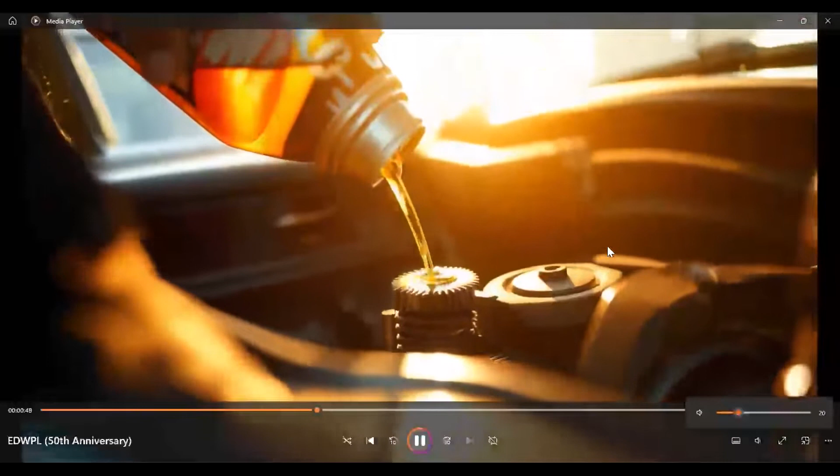नो विक्रम, आवाज नहीं लगा फिल्म का? Yes, sir. फिल्म का आवाज नहीं है? Hi, sir. आवाज नहीं है फिल्म का? Wait. So it's not audible. Yeah. No. Wait, sir. Sorry. Now it's audible. Okay. Yes, okay.

By Sigma Weld. The toothpaste you rely on, sealed tight by Sigma Cap Seal. Even the mouthwash that keeps you fresh, protected by our expertise. Every step of your routine, made seamless with us by your side. Even your safe and wardrobe, built to protect and secure, come from our welding expertise. The Nutella on your breakfast table, sealed with care by Sigma Cap Seal. From fresh juice to your children's favorite drinks, sealed by Sigma Cap Seal. As you commute, every vehicle you pass, cars, buses, trucks, and trains, runs with parts welded and heat treated by

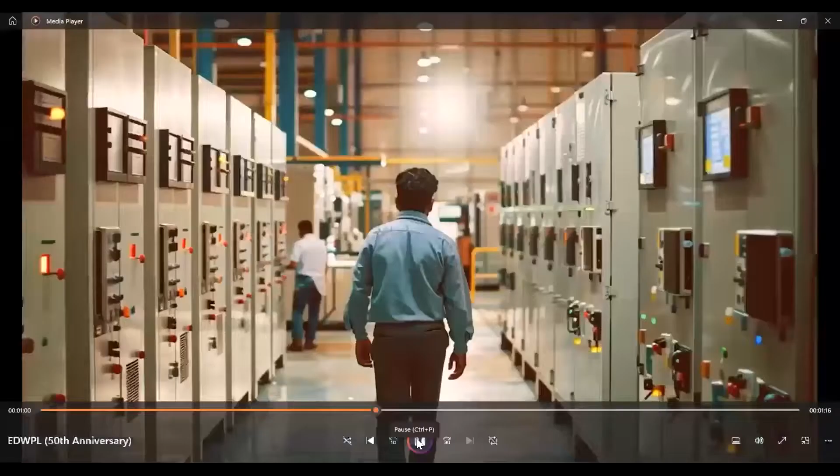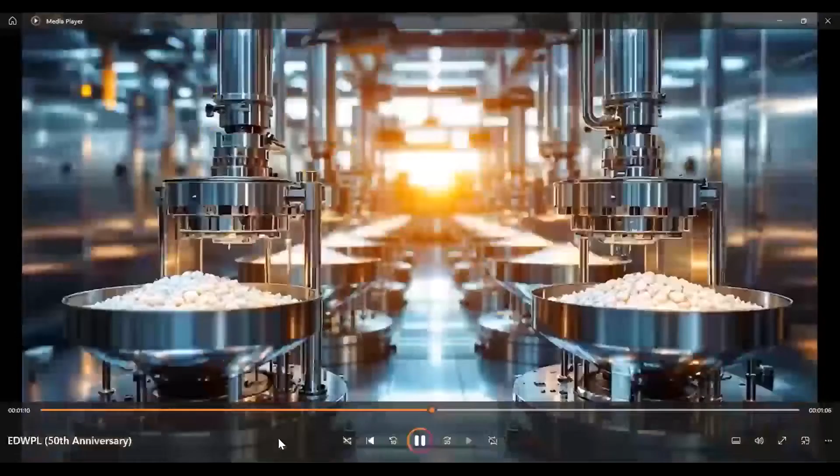Sigma Weld and Sigma Therm. Even the lubricants that keep these machines running smoothly, sealed securely by Sigma Cap Seal. Your comfort at work is made possible through air conditioning compressors, shrink fitted with Sigma Therm induction heating and welded by Sigma Weld. From switch gears, pre-molded by preheating, to the everyday devices you use, like your old phone, all preheated for molding using Sigma Therm's dielectric preheaters. In healthcare, we continue to make an impact. Our heating technology enables precision in the manufacture of tablets and capsules. Each bottle is sealed, and every cap is assembled with care by Sigma Cap Seal.

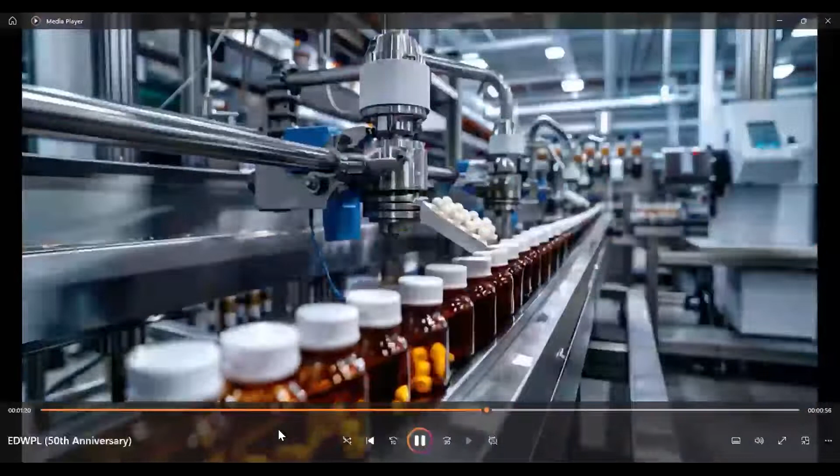From the steel utensils that serve your family to the bottles of ghee and masala that nourish them, every product is sealed securely by Sigma Cap Seal. Every jar, every flavor sealed to preserve freshness, ensuring your family enjoys the best every day. From the plates on your table to the pickles you savor, our technology touches your life in every way. Forged, annealed, hardened, brazed, sealed, packed, joined, welded. At every step, from the smallest details to the biggest innovations, we are there, touching your life at every turn. Add ED to your thought, and we'll make it happen.

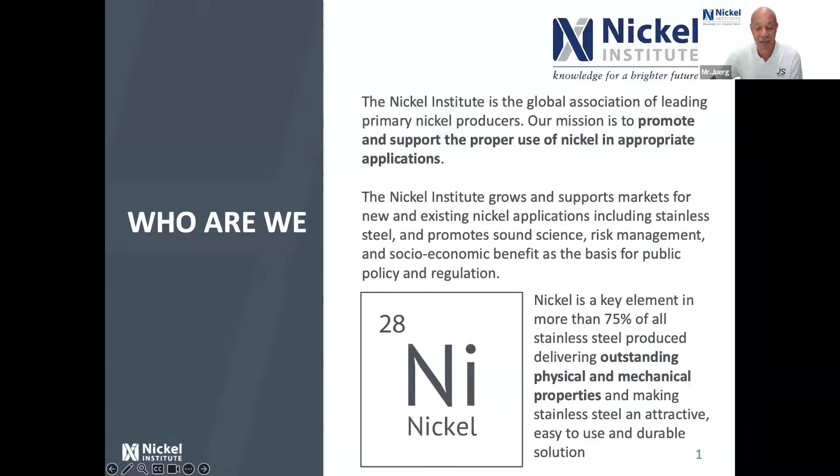Still, even with the hype of batteries, where a lot of nickel is used, still 70 to 75% of the nickel goes into stainless steel. That's why we focus that much on stainless steel and the education on stainless steel.

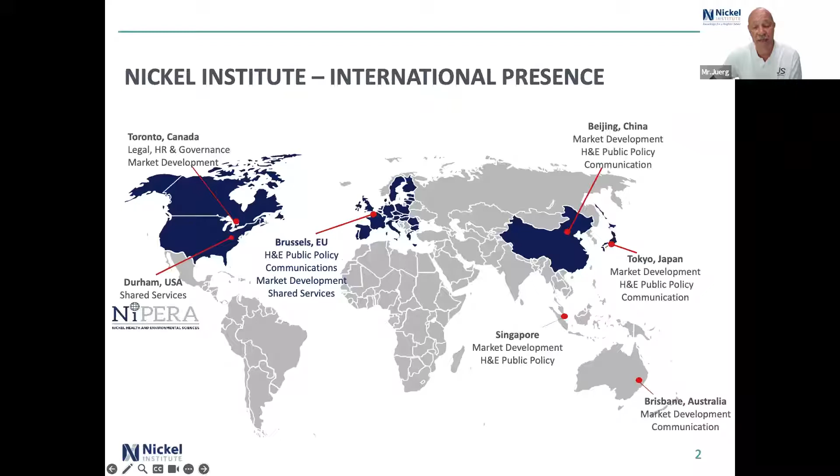Our headquarters is in Toronto, where Gary sits. Then we have science and research labs in the US in Durham, a European headquarters in Brussels, very close to the EU board. Then we go over to Asia, where we have a representative office, a non-profit organization office in China, and one in Japan. Then we have rep offices in Australia, and I'm sitting in Singapore.

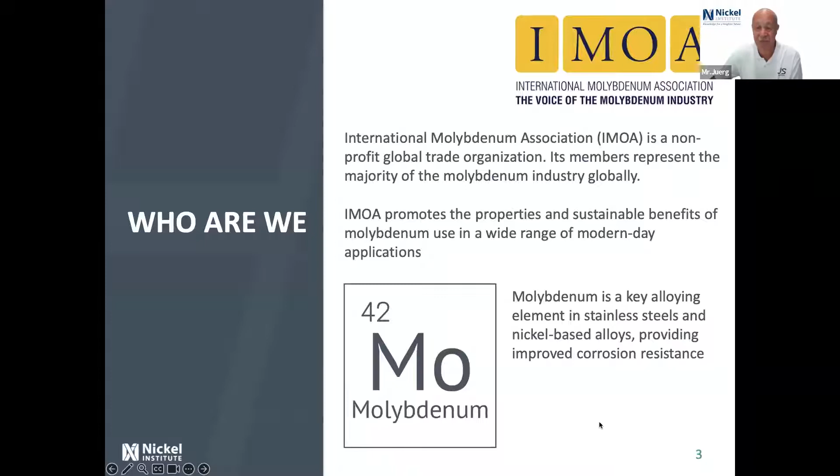IMOA is actually the same. They are representing the molybdenum industry. They are as well a non-profit organization. And as we all know, molybdenum is a key alloying element to improve the corrosion resistance as well as additional toughness and strength.

So they are as well in every daily life. Molybdenum is used especially in the higher alloying when it comes to the transition of green energy in the industrial and building application and so on.

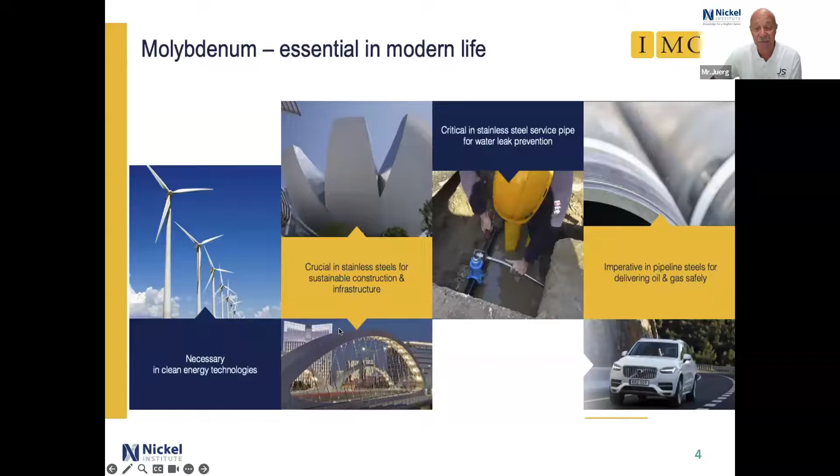But more important is actually the speaker of today, and that is Gary Coates. He is the technical manager for the Nickel Institute in Toronto. Gary is a metallurgical engineer who has worked in the stainless steel and nickel alloy industry for over 48 years, the last 25 with the Nickel Institute.

He has worked in many different end-use industries and with fabricators to ensure the quality of the fabrication, to ensure long life of the equipment. He is actively involved with many professional societies in the corrosion, welding, and metals and mining industry. He has made so many presentations on all aspects of the use of stainless steel and nickel alloys. Gary is a professional engineer registered in Ontario, Canada, where he is based and living as well.

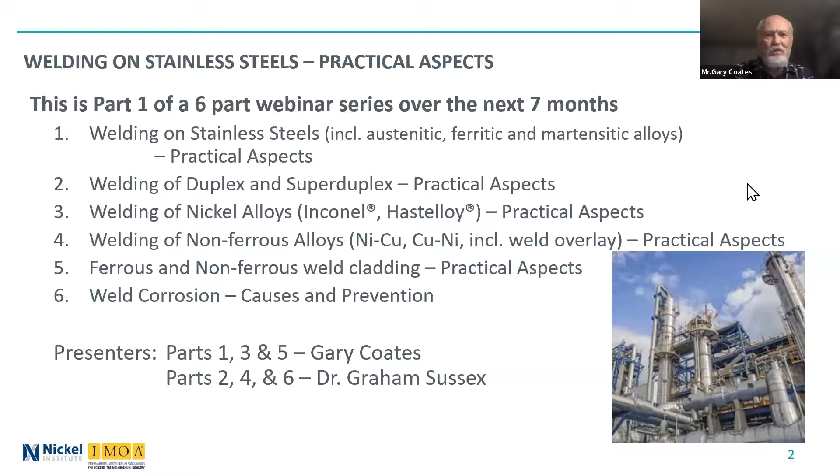So today's agenda: I'll make some general comments about welding of stainless steel, including some misunderstandings that are commonly seen, or at least I've seen throughout my career. We'll talk about welding of austenitic alloys, and it will not be a really complete one on austenitic. We could talk all morning or all afternoon or evening, I guess your time, about them, and then some details about welding ferritic and martensitic alloys, and we'll allow some time for questions.

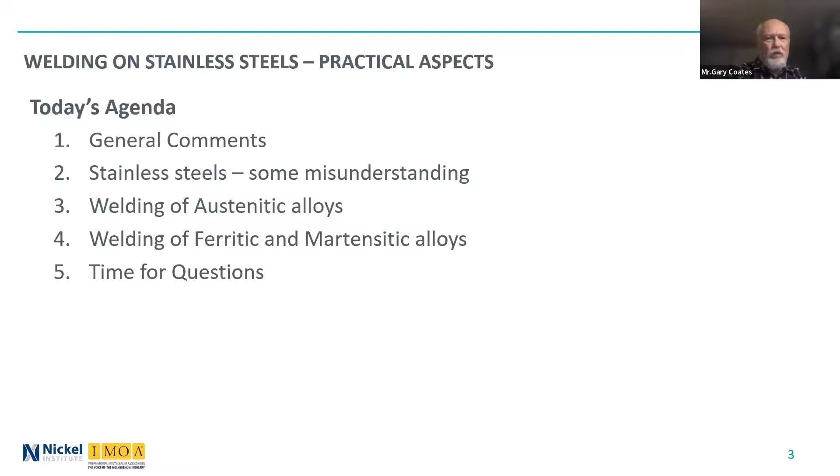So a few general comments, and I've done some of these webinars before, and I always like to emphasize that the welder is a very important part of this system. Most of us are weld engineers or weld inspectors or non-destructive testing people, but the welding involves both science and manual skills. When I look at the American Welding Society journal, there's practical articles, and then there's articles that are deep into the theoretical metallurgical part of it. So it involves both, and melding the two together are so important.

Welding involves a high level of skill. I really admire welders, their hand-eye coordination. And it's important for everyone, the welding engineer, to stay up to date. And it's important to train the welders in language and concepts they understand. So as a metallurgical engineer, I cannot use the words necessarily that I use to talk about welding with other welding engineers. I have to simplify it for the welders using concepts they understand.

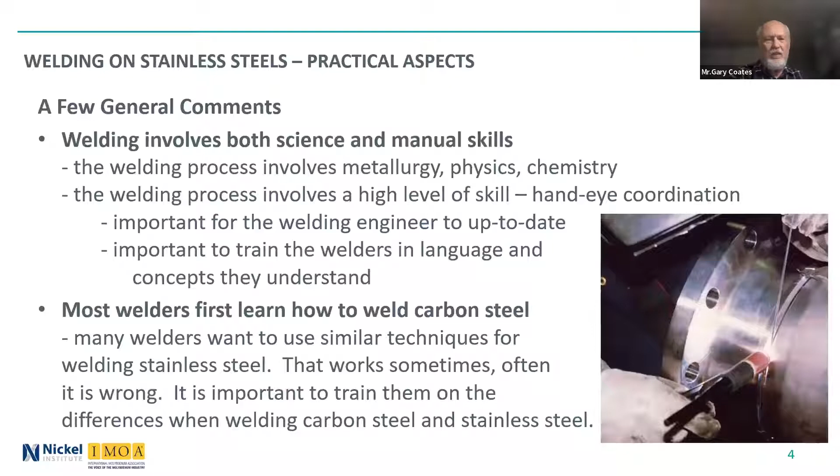Welding is critical to successful fabrication of stainless steel. And we really have to ask ourselves, especially as welding engineers, what is needed? Is this for corrosion resistance? Do I have to weld it to optimize the corrosion resistance, or the high temperature properties, the properties of interest, in which case it's maybe a completely different set of rules for the stainless steels.

One of the things welders often say when they're showing off a weld is, this is a good looking weld. And that is important, but it's not necessarily a good weld if they've used the incorrect filler metal, or sometimes no filler metal where filler metal is actually needed, or they used an unsuitable welding procedure, too high heat input, for example. The weld may look good, but it may fail quickly in service. And of course, they do not see that.

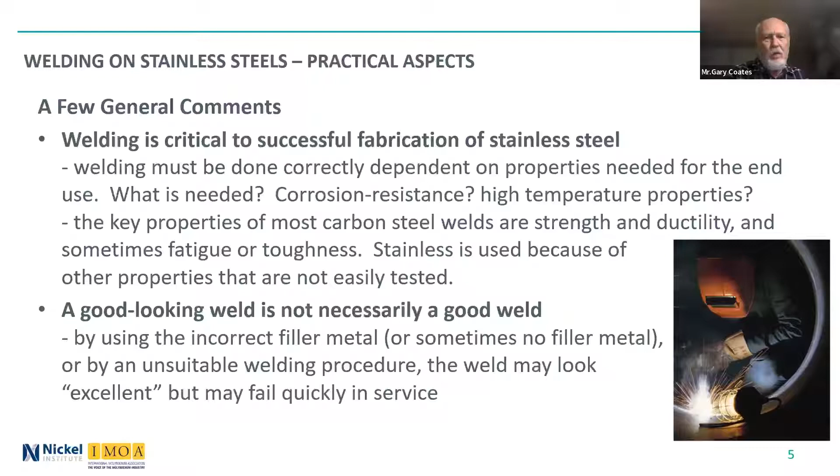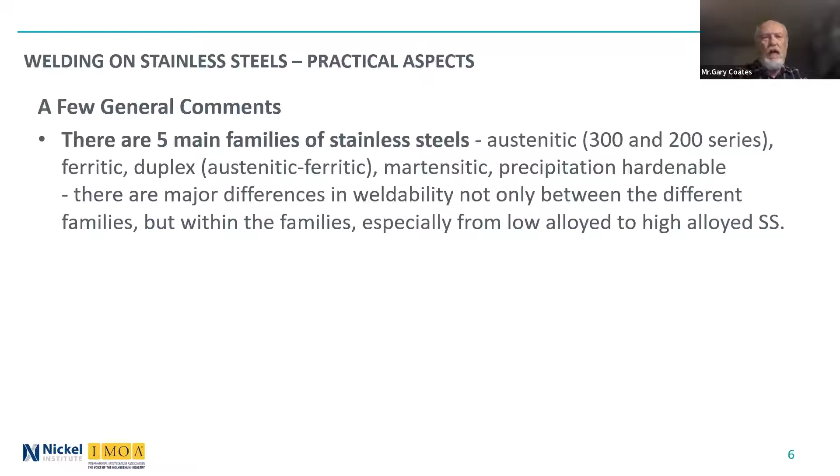We all know that there are 5 main families of stainless steels: the austenitic series, the 300 and 200 series, ferritics, the duplex austenitic-ferritic ones, martensitic, and precipitation hardenable. And of course, there are major differences in weldability, not only between the different families, but within the families, and especially between the low alloyed and high alloyed stainless steels.

One has to remember there are hundreds of types, and in North America with ASTM, we use the word 'type' preferably instead of grades or alloys when referring to the ASTM standards. But there are hundreds of types of stainless steel. For example, ASTM A240, which is the plate, sheet, and strip specification, there are close to 200 different types or alloys listed. In some of the other ASTM standards for other product forms, there are even more alloys listed.

So there's a whole group of alloys there that some were very familiar with, and some were not familiar with very much at all. And of course, in different national standards, there can be variations of many of these grades too, and grades that aren't included in the ASTM.

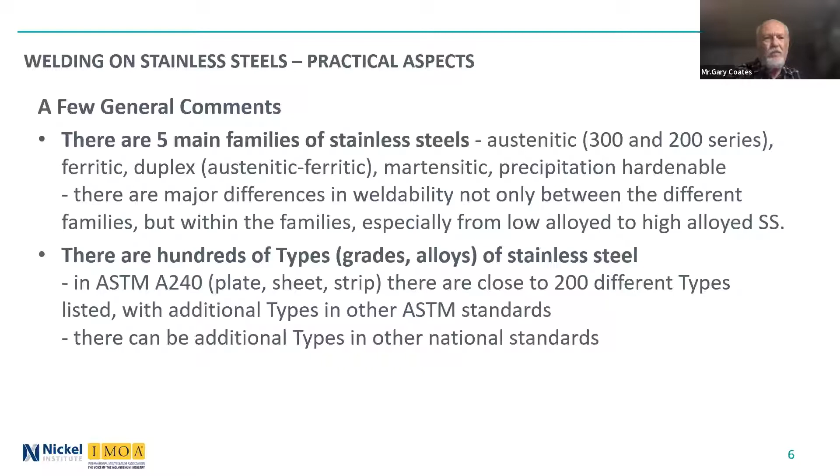So it is really critical for the welding engineer, the quality assurance guy, the foreman, to know the exact alloy being welded. Now, I'm posing the question, is it important for the welder to know that? And so I'm going to take a few cases here.

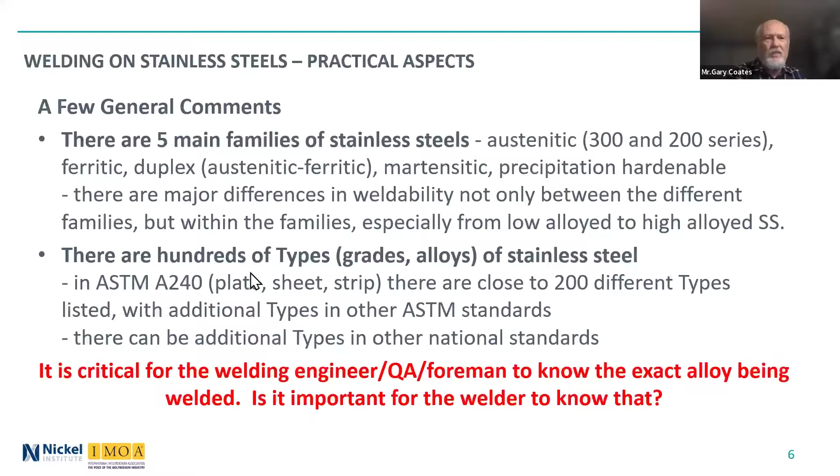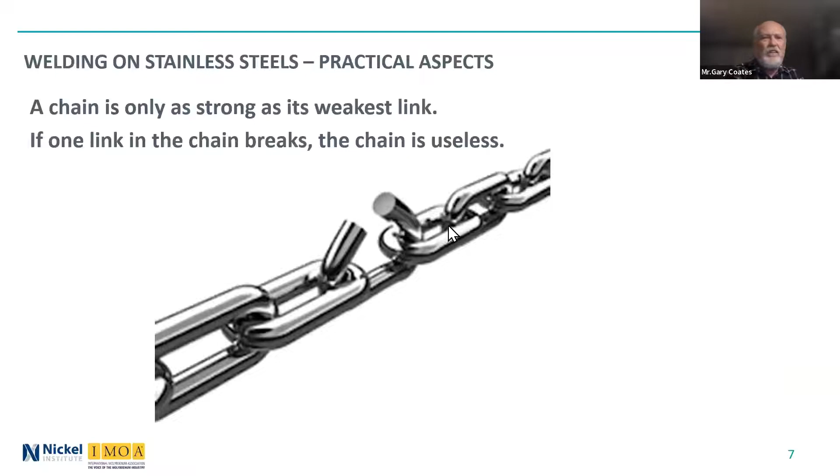First of all, the chain is only as strong as its weakest link. That's a common expression we use. And if the chain breaks, the chain is essentially useless. So if the welding engineer has specified it right, but the welder is doing it wrong, essentially the weld is bad. And the welds in a stainless fabrication are usually the weakest link.

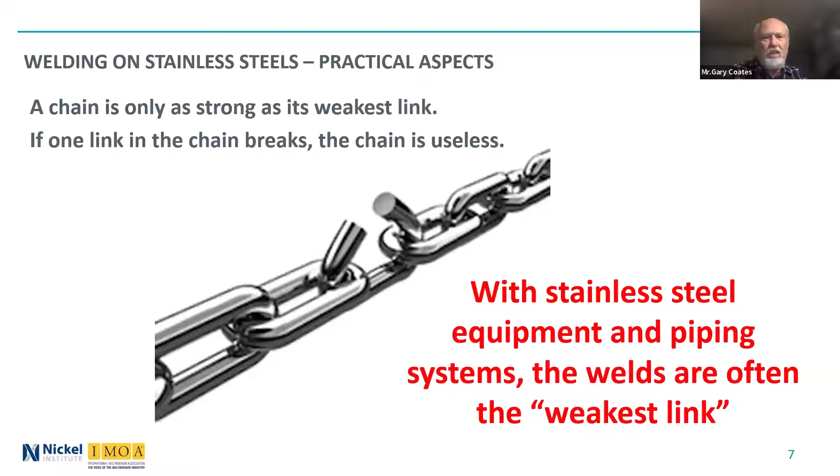So let's take a couple of misunderstandings that I have come across. The first one: the welder knows that 308L filler metal is the matching filler metal for 304L, but after finishing most of the components, he ran out of 308L, and decided to use 316L to finish the job. After all, 316 is higher alloy. It's got molybdenum in it, a little higher nickel content, and it is more corrosion resistant than 308L. Was what he did correct?

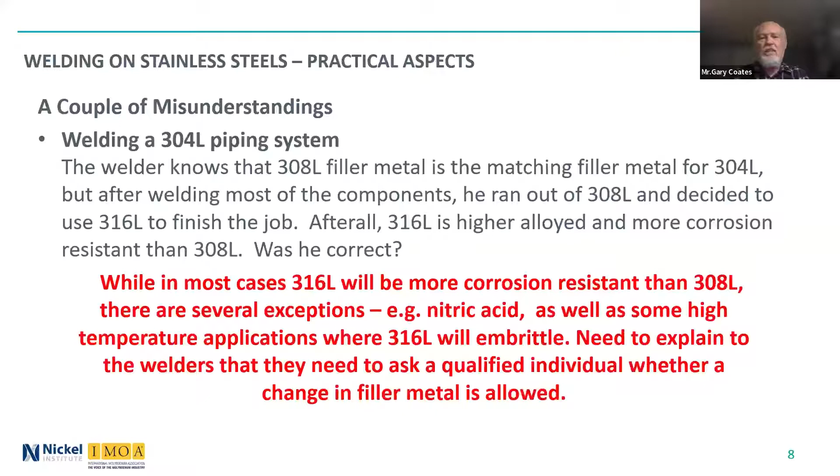Well, in most cases, 316L is more corrosion resistant than 308L, but there are several exceptions, one of them being nitric acid, where 308L, 304L is more corrosion resistant than 316L. And there are some high temperature applications where 316L will embrittle, where the 308L will not embrittle as quickly. So we need to explain to welders that they need to ask a qualified individual whether a change in filler metal is allowed. Now, if you were doing something very strict in the nuclear industry, there would be probably no question about the welder changing the filler metal on his own. But in many plants, and especially when there's fewer people around, he may make the decision himself.

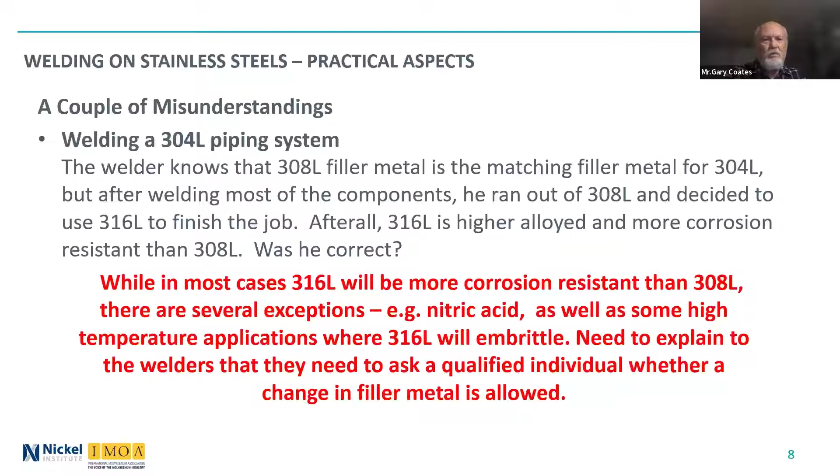So another example on a 316L tank, a welder did the qualification testing using 308L filler metal on 304L plate. That qualified him for welding the ASME P8 Group 1 material. His weld passed the bend test, and maybe a tensile test was done too. Then he was given 316L shielded metal arc electrodes to weld up the tank, but they didn't weld as nicely as the 308L he'd used in testing. So he switched to 308L. And why not? They passed all of the tests that he had to do.

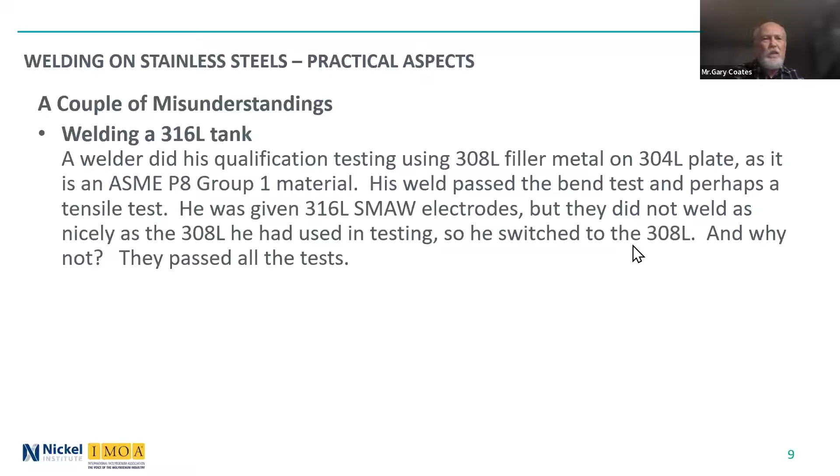And of course, most of us know that that is completely wrong. 316L in this particular case would have higher corrosion resistance to the tank media, and very rarely do we ever do corrosion testing as part of the qualification. So the welder hasn't understood that, even though both meet the ASME P8 Group 1 material qualification, there's a difference in why the different alloys are used. Therefore, you did it wrong.

Now, some of you might say, oh, that'll never happen in my shop or in my chemical plant. But in reality, I was involved in a case that didn't involve 308L and 316L - it involved duplex and super duplex, where they got qualified on 2205 material. The component was actually the super duplex alloy, and they welded it. The shop foreman and the welders were all happy to weld it with 2209 filler metal, the one for 2205. And of course, they even delivered the component to the end user. Then it was discovered that, wow, this is completely wrong. The whole job is essentially scrapped. You have to grind out the weld and re-weld it, and you still get an inferior product. So this actually does happen.

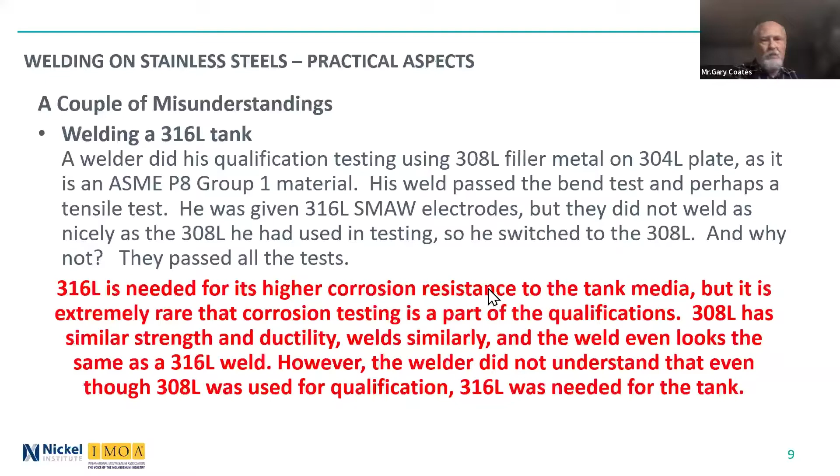And a third example here, again from my past experience - we were doing some training of welders and welding foremen at a chemical plant in Canada. The chemical plant handled some very corrosive, nasty chemicals, hydrofluoric acid. If you've ever worked with that, you know it is extremely dangerous for personnel. We had a question period at the end, and one of the welders asked why we didn't talk about the electrodes that could be used for many different stainless alloys, and we didn't quite understand what he was talking about.

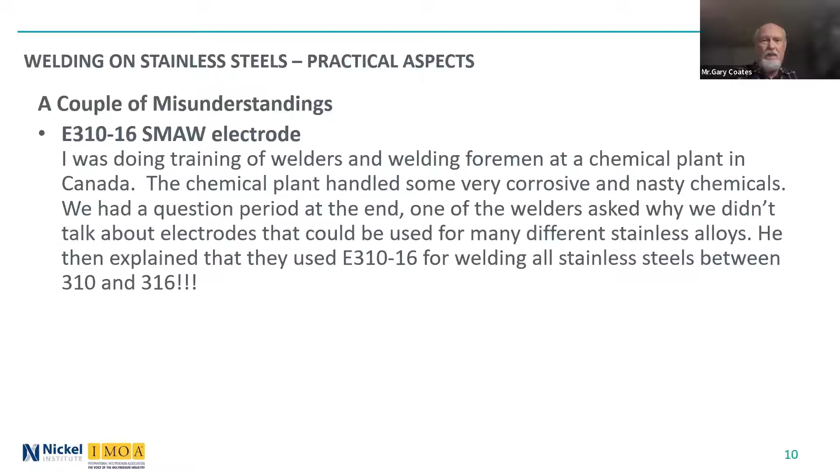He explained that they used 310-16 for welding all stainless steels between 310 and 316. Again, we were all shocked, literally horrified to hear it. The other plant engineers were horrified too that this was actually happening. Again, training the welders on the classification - the -16, I'm sure you all know, is the type of coating on the coated electrode - but the welder probably was told by somebody else that this was the case, and that's what he used. That resulted in a very dangerous situation where a material that shouldn't be used for that particular job was used, with the possibility of major leaks and danger to personnel.

Something similar is that, and I've seen it a few times, we've been told that an alloy such as 347 has very high corrosion resistance. They believe it's true because the number is higher than 316L, 317L. You can sort of understand where that's coming from - 316L is a higher number than 304L, usually more corrosion resistant; 317L is a higher number than 316L, more corrosion resistance. But of course, it's completely wrong. And we've seen this both in North America and in Europe.

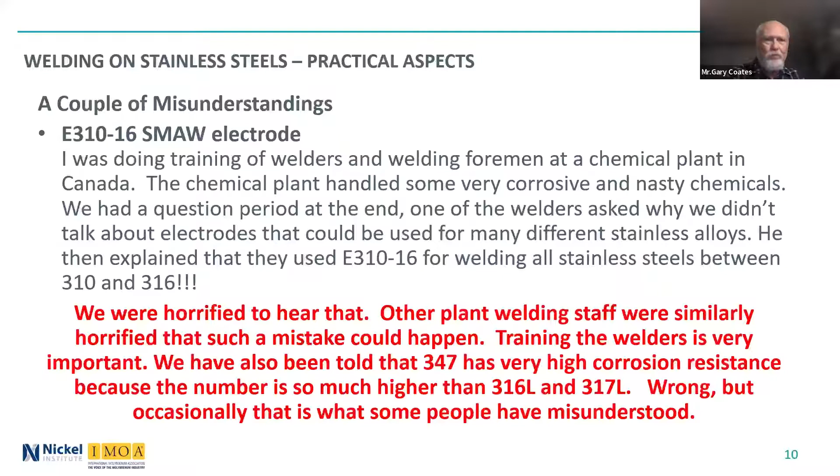So let's move on to talk about austenitic stainless steels. Over 75% of all stainless steel produced is an austenitic type. So if somebody says, I've welded stainless steel before, chances are it was an austenitic grade - most likely 304 and its variants, 304L, 301, 302, are really the most common steels encountered. And if you work in a chemical plant, you know 316L is extremely common too.

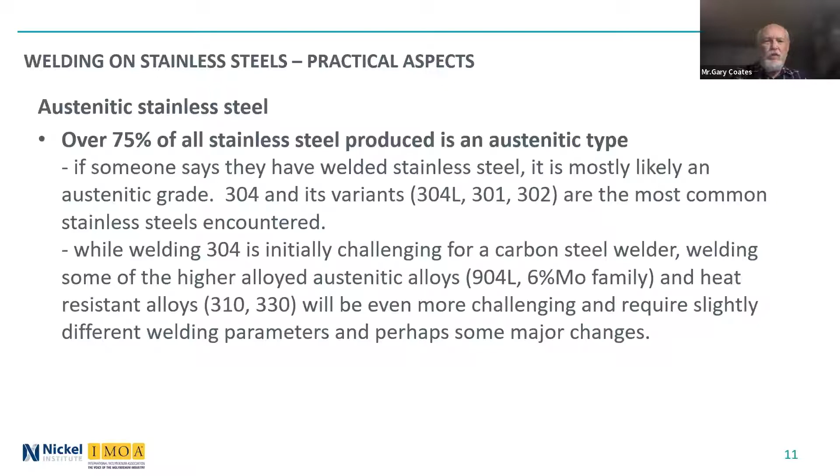Welding 304 is, of course, as we all know, initially challenging for a carbon steel welder. But when you go to welding some of the higher alloyed austenitic alloys - 904L, the 6-moly family, grades like 254 SMO and AL6XN, and some heat-resistant alloys - they're even more challenging, requiring slightly different welding parameters, and in some cases major changes. So just because somebody says I've welded stainless steel doesn't mean they really know what stainless steel they should be welding. It's up to us to make sure they understand the important differences.

So there's lots of things I can talk about in austenitic stainless steel. I'm going to focus mostly on the ferrite content. Most of us know that many, not all, of the austenitic filler metals have a composition designed to result in a certain amount of ferrite in the weld metal. The reason for this is to prevent, or at least lower the risk of, hot cracking in the weld metal.

There are a number of misconceptions about this, less among weld engineers, but among welders. They hear ferrite and think ferrite is iron, because the chemical symbol for iron is Fe. Of course, ferrite is not iron, it is a metallurgical phase. Ferrite, austenite, martensite—those are crystal structures.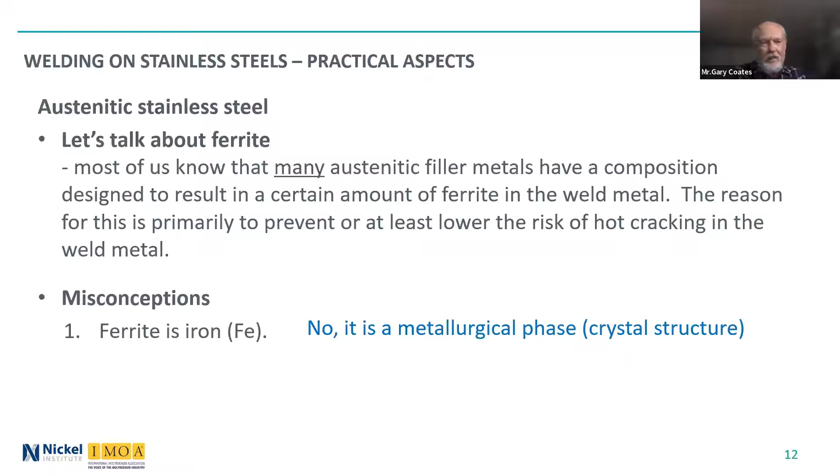So in itself it's not necessarily dangerous, but since all stainless steel has iron, there's a perception that, okay, there's iron in stainless steel, so that is my ferrite content, that's how I get it, it's the amount of iron. Well, no, that's not it.

Secondly, people think manufacturers of electrodes and wire add ferrite to the wire or electrode, something you add. No, it is the composition that determines it—the composition of both the wire, and if there's a flux involved, the coating on the flux. The amount of ferrite that forms is determined by the composition of the wire and coating, and also involves the cooling rate of the weld.

A faster cooling weld will have a different ferrite content than one that is slowly cooled. Not a huge difference, but something that's important.

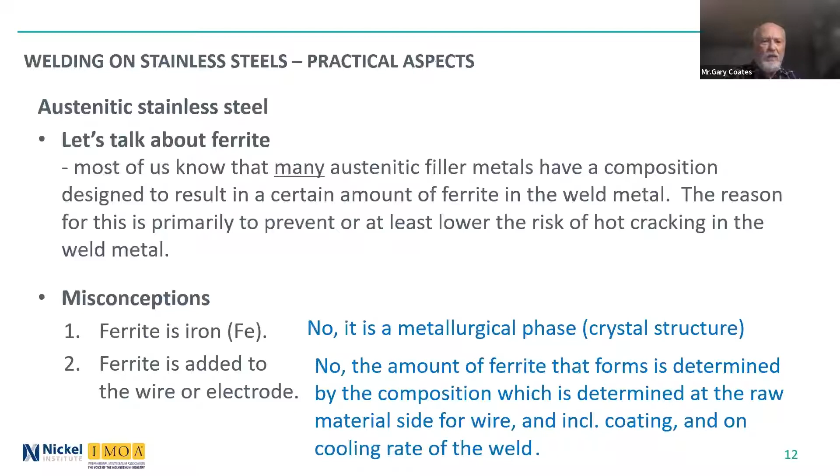Most of us are familiar with diagrams that describe the ferrite content of a weld, and they're very useful, but they only give approximately the ferrite content of the weld. You can't use it to say, okay, we get 8.5% ferrite, that's what I calculated, and expect to actually get 8.5. It could be plus or minus maybe 2% ferrite for the actual weld.

Really, nitrogen needs to be in there, but it's really difficult to measure nitrogen that actually goes into the weld metal, because in the arc, when you transfer droplets of molten stainless steel from the wire to the base metal, they can pick up nitrogen. So you do make some assumptions about the nitrogen content, and there are diagrams that include nitrogen.

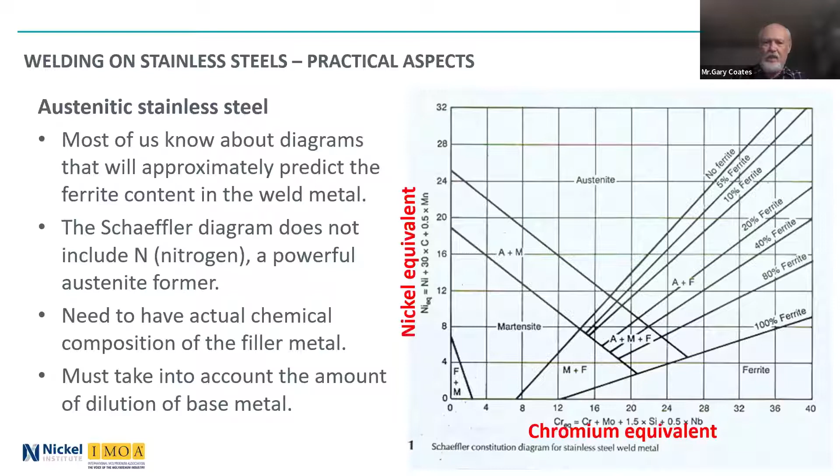So you need to ensure, if you're using these diagrams, that you have the actual chemical composition of the filler metal. And you must take into account the amount of dilution from the base metal, because these diagrams are made for 100% weld metal, but in welding you do get dilution from the base metal, which will generally have a very low ferrite content theoretically when you plot it on these diagrams.

So I'm going through a series of questions here. Do 300 series wrought alloys—plate, sheet, bar, pipe, etc.—contain ferrite? The answer is basically most of the wrought alloys contain 0 or close to 0% ferrite. 304, 304L today especially, may have up to 2% ferrite present.

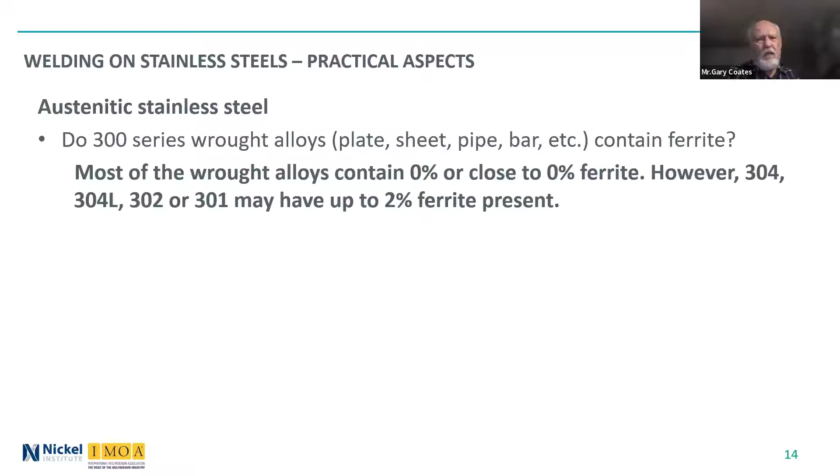Now maybe you say, well, I've done a ferrite measurement on some 304, and that shows much higher percentages of ferrite. Why is that? Well, these gauges depend on the magnetic response of the material, and while ferrite is ferromagnetic—it responds to a magnet—

so is martensite. And martensite is easily formed in 304 and similar alloys due to cold working—things like forming, stretching, rolling, or machining it, even left over from a cold finishing operation at a stainless steel mill. So if you measure the base material, the plate, for example, with a Magne-Gage or Fischer Ferritescope, it may show a higher level of ferrite than is actually present because it is also detecting martensite.

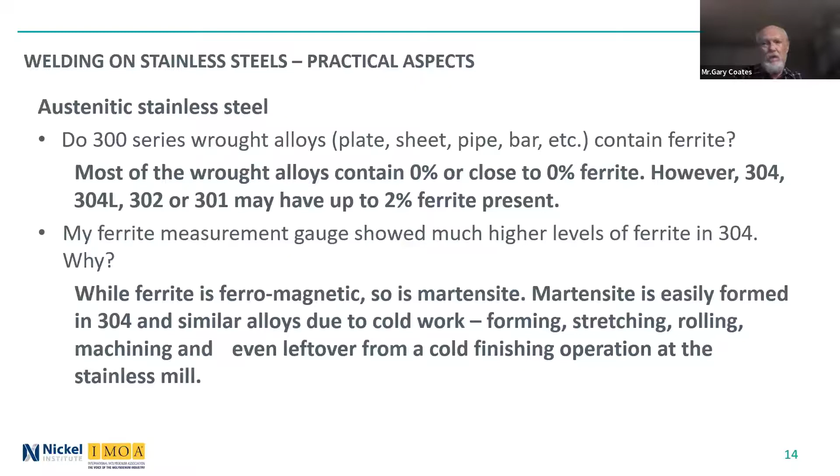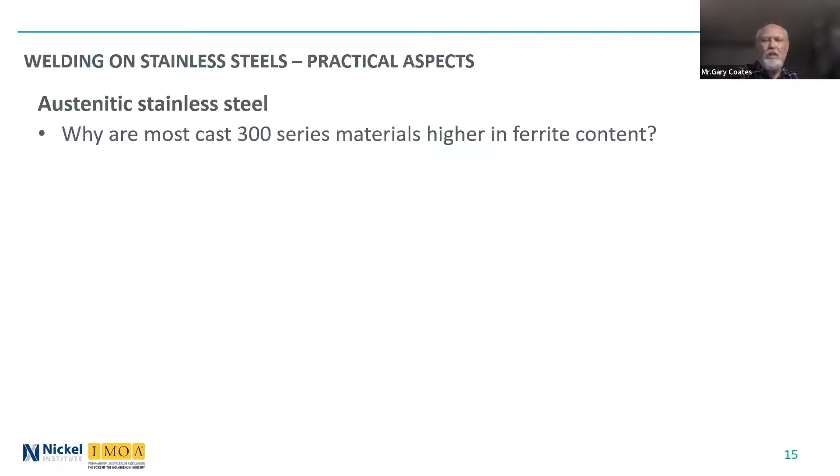Most of you understand that cast 300 series materials are higher in ferrite content than plate, sheet, bar, etc. That's because foundries most often have very limited refining capabilities. They can't take out things like sulfur, which when present in larger amounts can result in hot cracking of the material. So they intentionally have a higher ferrite content, and sometimes they will make a 304L type cast material up to 20% ferrite—very high levels, higher than you would ever see in a weld electrode.

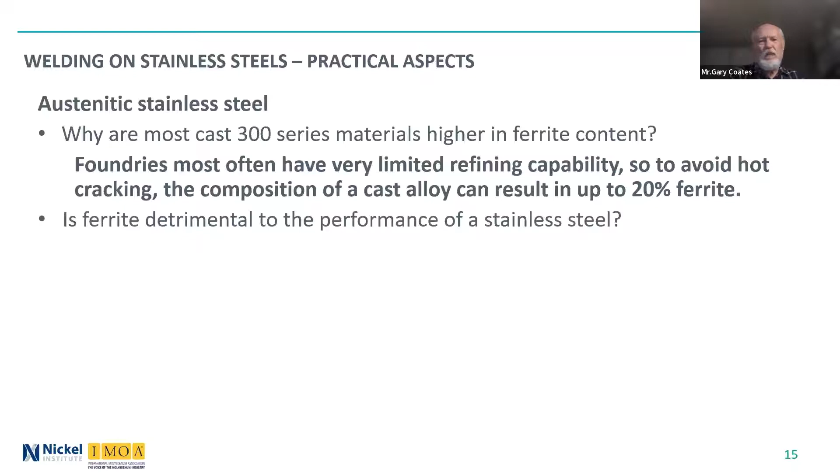You might ask, is ferrite detrimental to the performance of a stainless steel's corrosion resistance or high temperature properties? The answer is, yes, in many cases it can be. When the ferrite level is less than 10%, it's generally not detrimental. But higher ferrite levels may decrease the corrosion resistance, not in every environment but in some environments. Even a small amount of ferrite may be detrimental to corrosion resistance in a very few cases.

Often in those cases, the engineering company involved with the welding will specify a maximum ferrite content in the weld of 2% or even lower. For urea grade materials, they often say 0.6% maximum ferrite in the welds.

In high temperature applications, ferrite can embrittle with time—it can become brittle. If you have a small amount of ferrite in an alloy, you have a series of hard particles. That generally is not a problem; it actually makes the material a bit stronger. But where you have high ferrite welds, 10% or higher, it can lead to cracking in service. Now all that takes time, so you don't see it right away—it might take a year or two before it actually fails.

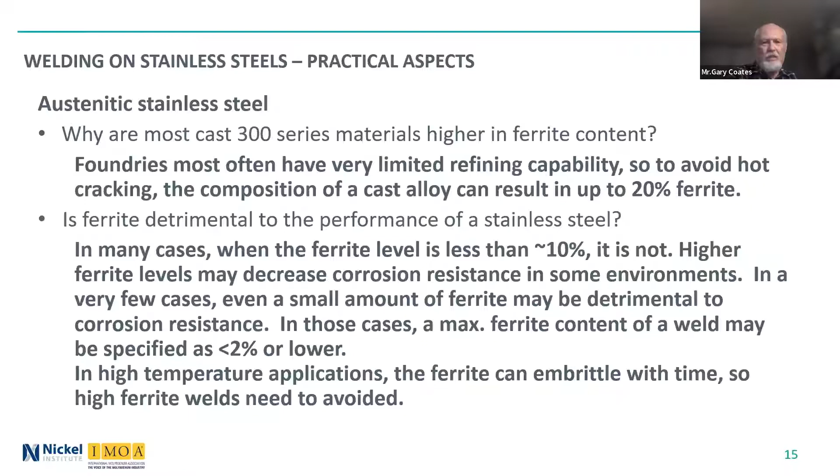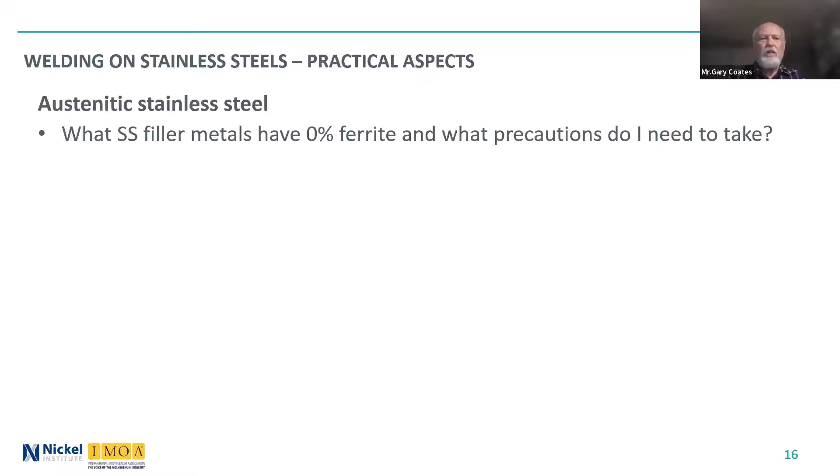So there are some filler metals that have 0% ferrite. Which ones, and what do I have to do about those? Well, the most common ones with 0% ferrite are the filler metals for 904L and the 6% molybdenum alloys, used in corrosion applications, and the high temperature alloys such as 310 and 330. They have 0% ferrite in the filler metals, and you have to be very, very careful when welding those alloys—lower heat inputs than you would for standard grades. Cleanliness of the weld joint is very important, and avoid a highly constrained joint, as the weld cools and shrinks, puts stress into the base material.

If it really can't move, it can easily lead to hot cracking. And what stainless steel filler metals have high ferrite contents? Well, 309L, 309, and a variation called 309MoL have higher ferrite contents than 308L or 316L, and they're especially used to weld carbon steel to stainless steel. Carbon steel can contain contaminants such as a higher sulfur content that can lead to hot cracking, but also you have a thermal expansion mismatch between the two, so you have a more highly stressed joint there.

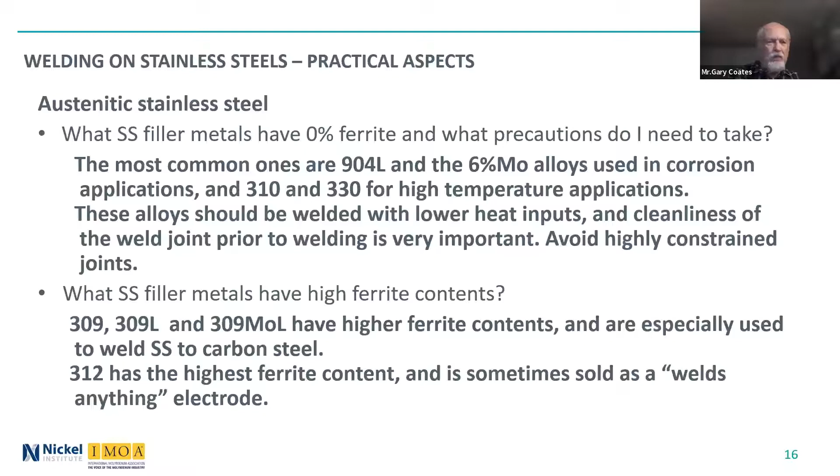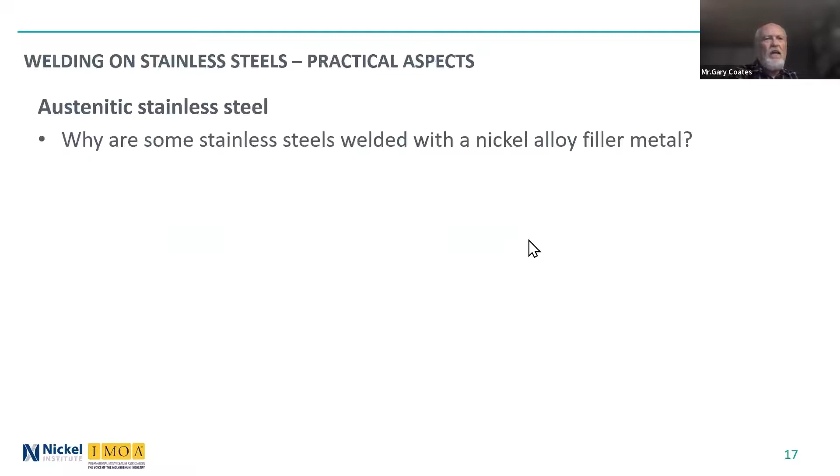Why are some stainless steels welded with nickel alloy filler metal? Well, the high molybdenum alloys—6-7% molybdenum stainless steels, the 254 SMO, AL6XN, etc.—cannot be welded with a matching filler metal, as the weld would have significantly lower corrosion resistance if done that way. So you have to use a very high molybdenum filler metal—9% molybdenum, which is the 625 or Nickel-Chrome-Moly 3 electrode, is most common for the 6% moly alloys. But the C family of alloys, Hastelloy C276, C22, and some other brand names, can also be welded, and they have even higher molybdenum content, anywhere between 11 and 16%, so they are more corrosion resistant than the base metal. And those alloys, of course, cannot be welded autogenously, that is, without filler metal.

Another question is, can I weld one austenitic stainless steel with a higher alloyed austenitic filler metal? For example, can I weld 316L with 317L? Is there a problem there? And the answer is, normally there is not a problem. Yes, you can normally do that.

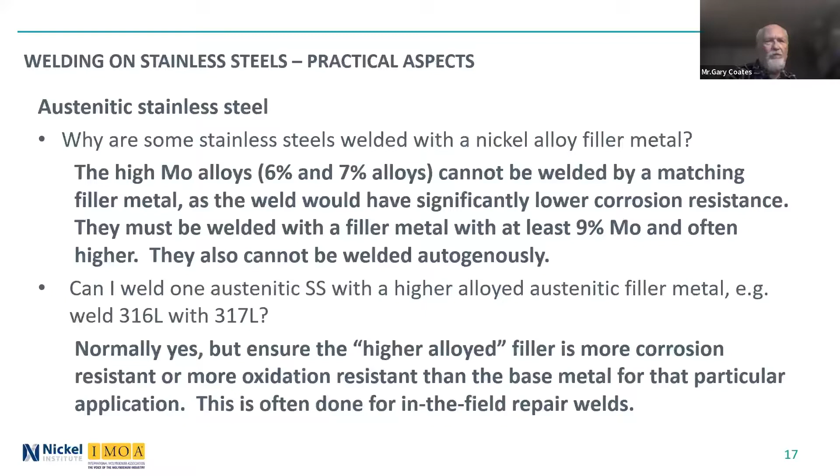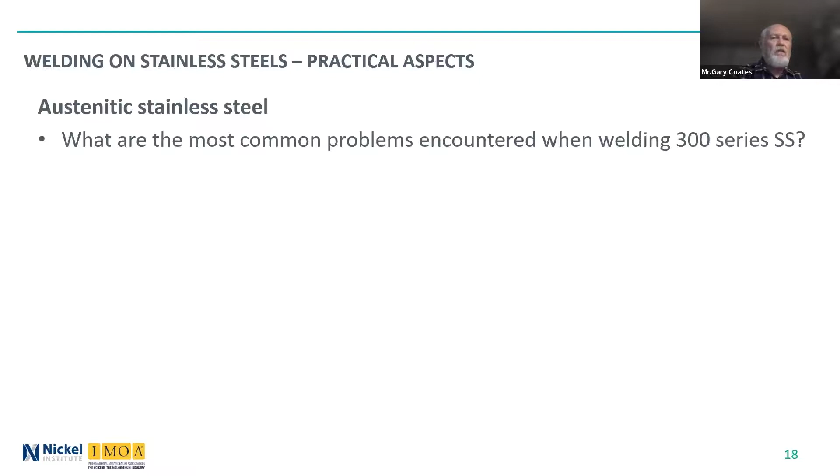So what are the most common problems encountered when welding 300 series stainless steels? Well, the first one, just taking from my experience, is distortion. The 300 series have a high thermal expansion coefficient compared to carbon steel, and compared to other families of stainless steel. So distortion is really the number one concern that we have, in my experience. And it's also very difficult to combat.

There are things like, you need more tacks when welding together plate, and you need to use a lower heat input. High heat inputs will cause more distortion than lower heat inputs. A number of factors come into it, but distortion is the number one issue I see that people face.

Welding dissimilar metals is also an issue, again because of the difference in thermal expansion coefficient when you're trying to weld them together. It's not easy. There are complications when welding some of the copper nickel alloys to stainless. You have to use a butter pass or an intermediate pass. You can't weld the two directly together in some cases.

Also, lack of fusion, no root gap, because the austenitic filler metals have a lower penetration rate than what you are used to with carbon steel.

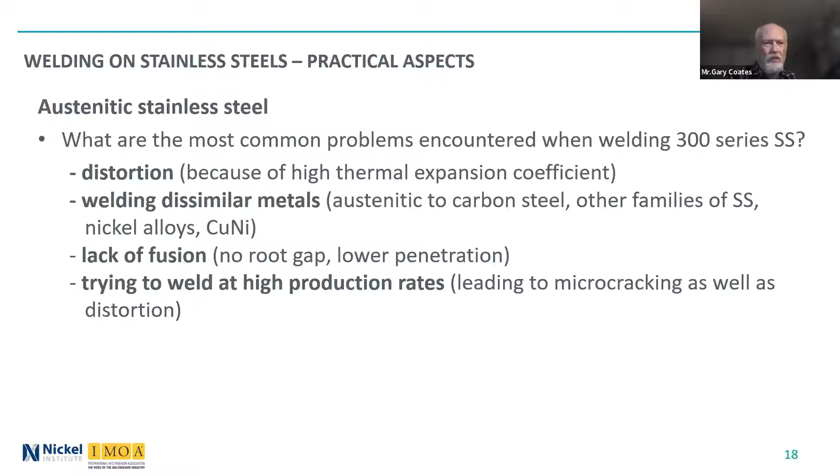I'm no expert on welding the 200 series stainless steels, and for those who are not familiar with them, these are austenitic alloys that are high in manganese and often have high nitrogen, and the idea is that those two elements can replace most of the nickel in an alloy. They are used a lot in thin sections for maybe the food industry and a few other applications, but generally not in the chemical or petrochemical or pharmaceutical industry.

They work harden more quickly than the 300 series. Sometimes they will add copper to them because that lowers the work hardening rate. Work hardening of the material can occur as the weld solidifies and shrinks, so it's pulling the material away. These materials are often welded with the 300 series filler metals.

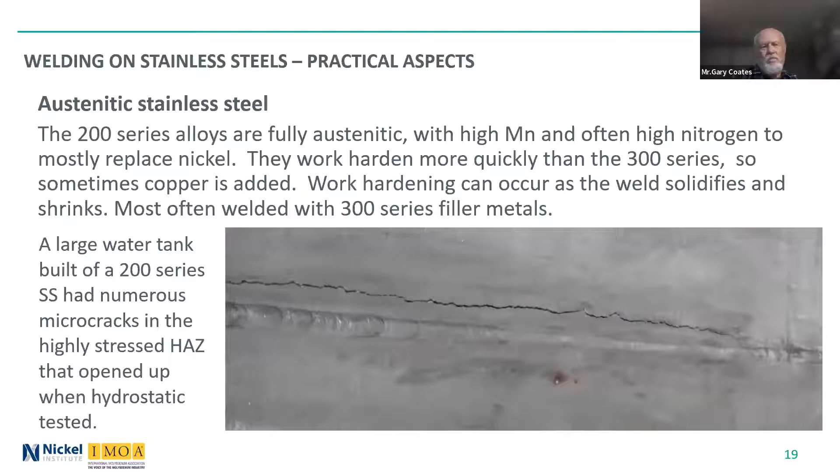I just show an example of a large water tank. It was built using a 200 series stainless steel, maybe about 15 millimeter thick plate. There were numerous micro cracks in the structure which were not obvious to the welders. And when they filled the tank full of water, there were quite a number of cracks that looked like this that needed to be re-welded again. So there can be some issues with thicker 200 series, not so much on the thinner materials.

In the time remaining, I want to move on to the ferritic and martensitic families. There are two families that have a great number of different alloys in them with varying properties, so we can only talk about broad guidelines here on weldability and welding. And we think of these two families as being very different. The ferritic stainless steels are not hardenable by heat treatment, that's one of the goals there, whereas the martensitic stainless steels are hardenable by a quench and temper mechanism.

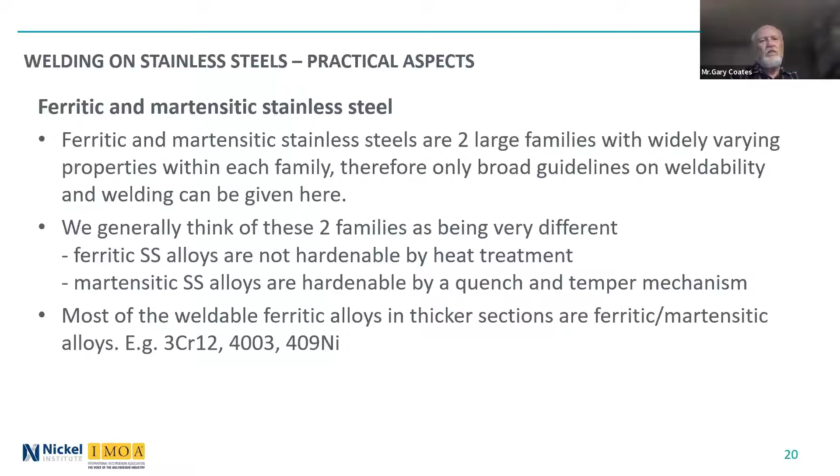But what is complicated and not really well understood is that when they call them weldable ferritic alloys, and they're used especially in thicker sections, they're actually a duplex grade, although not the austenitic-ferritic duplex, but a ferritic-martensitic grade. You're familiar, I'm sure, with 3CR12. The Europeans call it 4003. In North America we have a 409 nickel. They all have a slight nickel content, and they are not truly ferritic stainless steels. I'll talk briefly about them later.

And one of the most challenging issues I have is when somebody phones up and says, how do I weld 410 stainless steel?

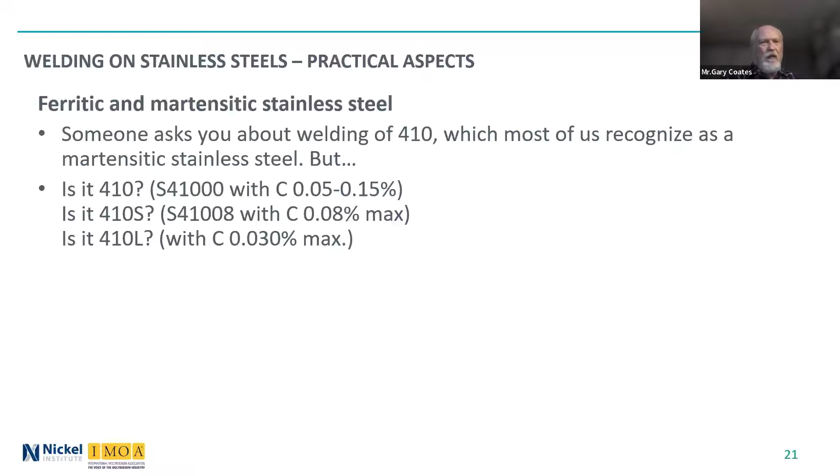And you know, the first thought is, well, 410, that's a martensitic stainless steel, but is it? Is it 410 with the higher carbon version, which can have as high as 0.15% carbon? Or is it 410S, a more weldable grade used in plant construction with 0.08 carbon max? Or there's a 410 low carbon version, with 0.030 carbon max, just like a 304L or 316L.

Now, if we had 0.15% carbon, the alloy would react to welding like a tool steel. In other words, it would rapidly harden in the heat affected zone during welding and likely crack if there was no preheat. If it was the S grade with, say, 0.06% carbon, the alloy would harden slightly in the heat affected zone, be fairly easily welded, usually with a low preheat, and if thin enough, maybe no preheat at all. Without preheat on thicker material, it could crack, but only on thicker material. And if the carbon content was 0.01%, the alloy wouldn't harden at all.

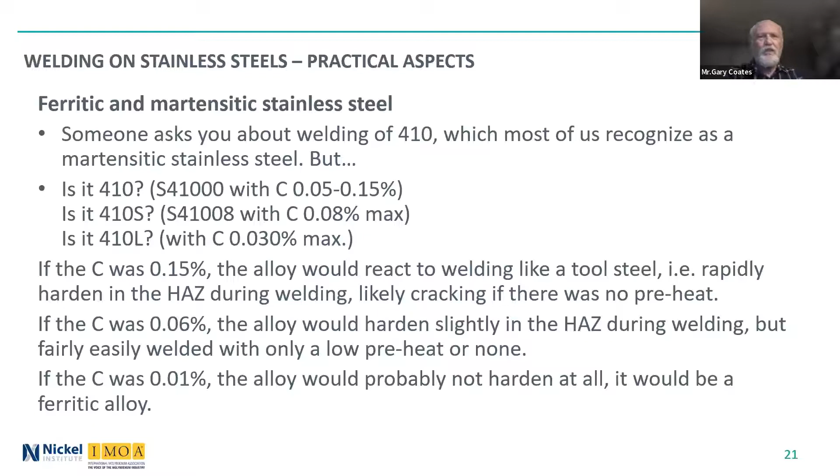It would actually be a truly ferritic alloy. So even though 410 is a martensitic alloy, the 410 low carbon version is essentially a ferritic alloy. So you can see it is complicated.

So I won't spend too much time on the properties of ferritics, but they're basically a single phase, the ferrite phase. There's often titanium or niobium there to tie up the carbon and nitrogen. Nitrogen can be very detrimental in ferritic stainless steels, so they want to keep the levels down low, and whatever level comes from welding, you want either titanium or niobium to tie it up.

A truly ferritic stainless steel doesn't harden with the heat of welding, although it may become less ductile and less tough. They have a comparatively high ductile to brittle transition temperature, which is alloy dependent. Sometimes it can be minus 30, minus 20. Other times it's around room temperature, and that ductile to brittle transition temperature can be even above ambient temperature. So you have to use them very carefully when you get into colder environments.

The thermal expansion rate is less than austenitic stainless steel, more similar to carbon steel, a little bit higher than carbon steel, but much, much closer to that than the austenitics. The thermal conductivity, the heat transfer through the material, is much higher than an austenitic stainless steel, but still significantly lower than a carbon steel.

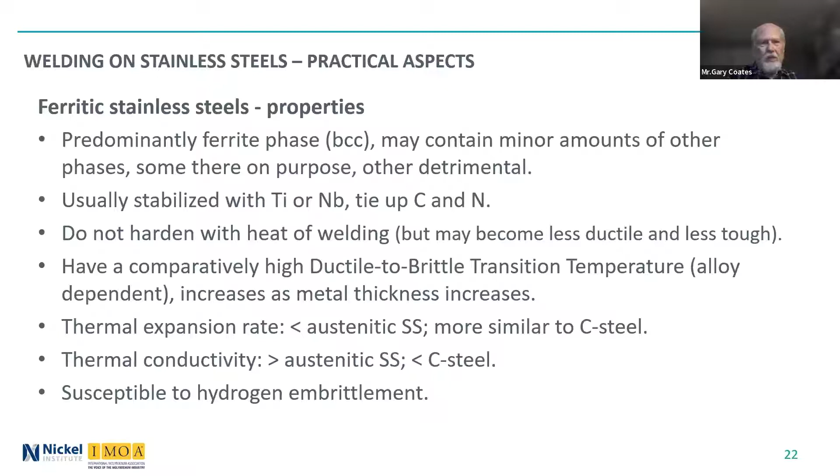Grain growth in the heat affected zone is most often the issue on thicker material of these purely ferritic stainless steels, reducing ductility, and often thicker material is not available because the thicker material from the mill will have a large grain size. So it's very difficult to make some of the pure ferritic stainless steels in thicker material.

Some of them are welded with a ferritic filler metal, some are welded with an austenitic one, and some can be welded with either. And there are advantages and disadvantages to using one or the other.

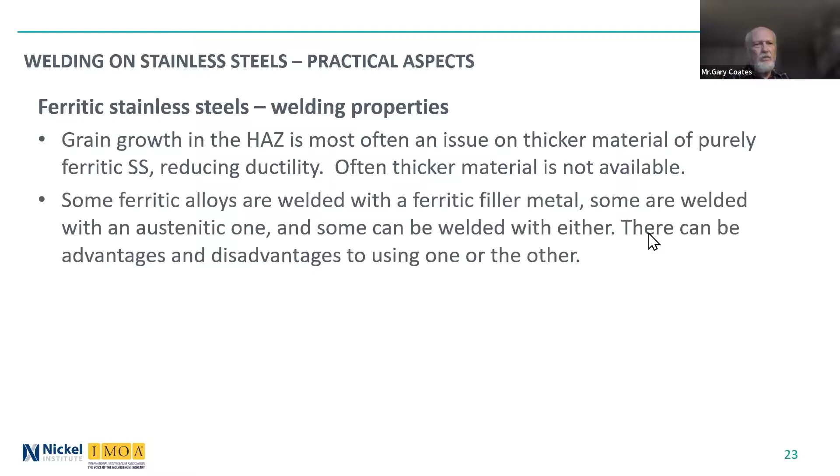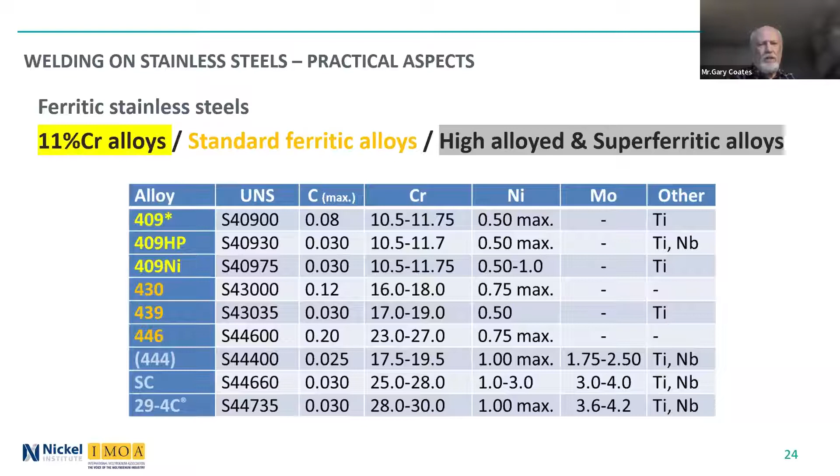This is just a list of grades, and I just picked some at random here, but I divided them into three families. That's my own division. One is the 11% chromium alloys. 10.5% is the minimum to call it a stainless steel. So these alloys are right at the very bottom end of the chromium content, and therefore the corrosion resistance. Then the ones in orange are a little higher in chromium content, and I call them more standard ferritic grades. Then we get into the high alloyed and super ferritic alloys, and we'll talk about each of those families. 444, or 18 chrome 2 moly, is a grade used in some parts of the world, and then there are some very specialized, normally proprietary grades that fall into this category.

So in general, let's talk about the 11% chromium ones, various types of 409. They don't form sigma phase or 475-degree embrittlement, and I'll explain the significance of that in the next slide. They're the only ferritic stainless steel alloys that do not. So because of the low chromium content, they don't form sigma phase or the lower temperature embrittlement.

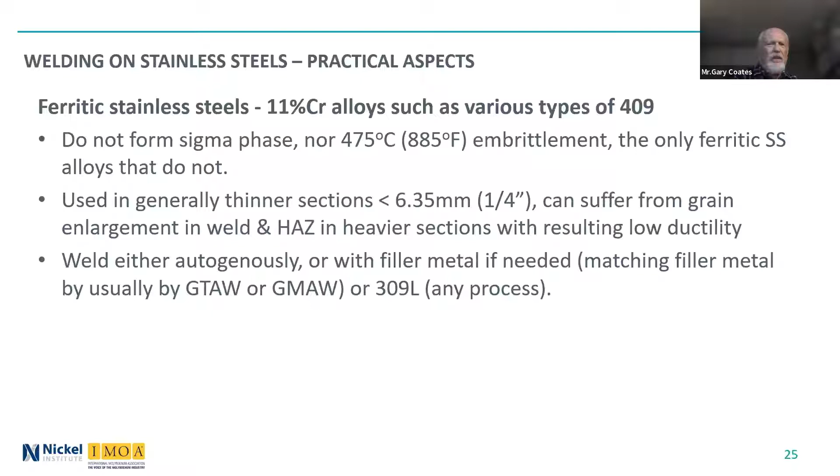Generally, you find them in thinner sections, less than 6 millimeters or a quarter inch, but they can suffer from grain enlargement in the weld and heat affected zone in heavier sections, which results in low ductility. They can be welded autogenously or with filler metal if needed, and there are some matching filler metals used, especially for automotive exhaust systems, which is high volume. If they can't be welded autogenously, they'll use a 409 type filler metal, with either gas tungsten arc or gas metal arc welding, and 309 can also be used on these alloys.

If we move on to the higher chromium ones, 430, 439, 446, they're not so common in the chemical and petrochemical industry, perhaps the 446 for some high temperature applications. They can embrittle by sigma phase and this 475-degree embrittlement.

Why I mention that is if you're trying to do a weld repair on ones that have been in service at that temperature, they may not be possible to weld repair. They may be so brittle that you cannot weld repair them. Again, grain growth is a problem.

You can weld them autogenously in thin sections or with a filler. There are theoretically available matching filler metals for 430 and 446. They can be welded with a 300 series filler metal too, if appropriate. The 446 is often used where you don't want nickel, so welding them with a 300 series is not a suitable way of welding them. You want to weld them with a matching or a ferritic filler metal.

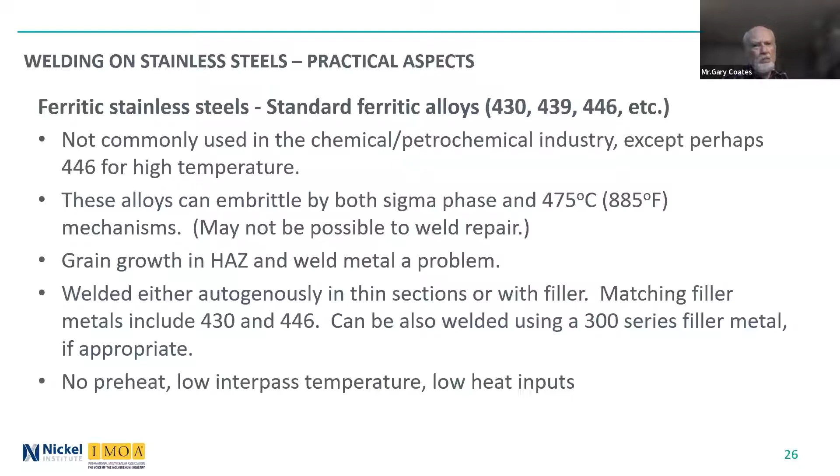And most of these alloys, you don't need a preheat. You do want a low interpass temperature and low heat inputs on them, and that's all to prevent grain growth.

Finally, the high alloyed superferritic alloys, generally only thin sections. Some of those superferritic alloys, the maximum thickness is produced at the mills. And I just see a mistake there - it should read only up to 2 millimeter, not 2 meter, 2 millimeter in thickness. Please correct that in your mind. I'll correct that when I give out the slides later.

It's used mostly as heat exchanger tubes, these alloys. Very careful welding procedures, very low heat input. Read your guidelines for the specific alloy. Cleanliness and a fully protective purging are critical. Occasionally, a matching gas tungsten arc filler metal is available. Otherwise, an austenitic one may be used of the appropriate corrosion resistance.

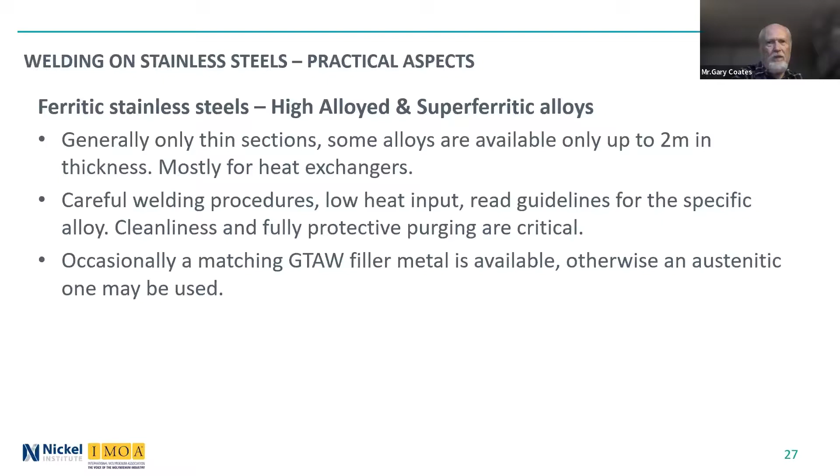These are all used in corrosion applications. I mentioned about the weldable ferritic stainless steels, which are actually ferritic martensitic grades. I know in India you're producing a number of them, and they do have their applications, especially in structural applications where you can use the strength of them. And because they're lower alloyed, they're also lower cost.

So they have resistance to inland atmospheric conditions, not near the sea where you have salt spray and chlorides present. As I say, the corrosion resistance is near the minimum for stainless steel. They are available in thicker sections - I've seen them up to 25 millimeter, perhaps thicker is available.

They don't have the same issues with grain growth, of fast grain growth in welding, although it does happen - they do grow in grain size in the heat affected zone. Generally it isn't the same issue as with the purely ferritic. Generally they're welded with 309 filler metal, and most welding processes are suitable for them.

You have to think ahead what properties you want in the weld and heat affected zone to ensure that you meet the requirements in terms of strength, ductility, and toughness. You can get these materials in strength levels that are stronger than the 309 filler metal weld properties, so then you end up with a lower strength weld, higher strength material, and that generally is not acceptable.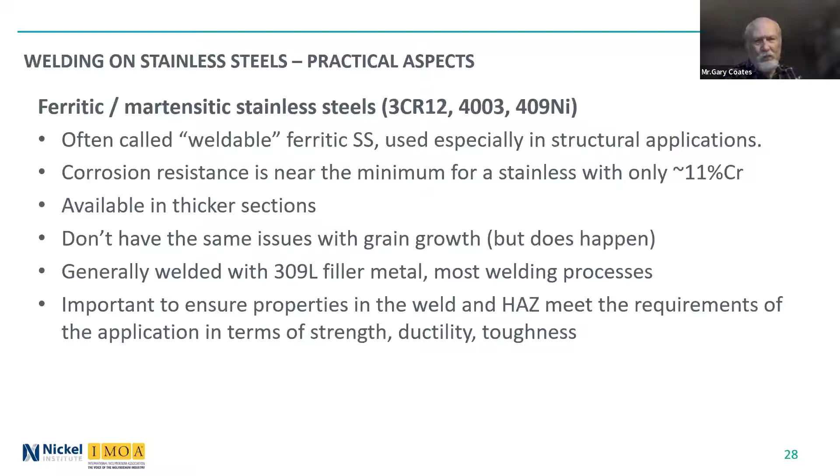So maybe somebody, one of you metallurgists in India, will help to solve that issue and come up with a filler metal that actually is suitable for welding the higher strength versions of these alloys.

I'm going to just briefly talk about martensitic alloys. You can divide them into three categories. A lot of these lower carbon versions are used in the oil and gas industry. The ones that have less than 0.06 carbon typically have a maximum hardness of 35 Rockwell C.

There's an intermediate carbon level that gives higher hardness, 35 to 55. And then there are the grades that you really want hard, 55 to 65 Rockwell C, and typically they have more than 0.30% carbon, so very high carbon content.

So just as a reminder, they're soft in the annealed condition, then you harden them by heating them up to a certain temperature and then quenching them, and then you temper them to bring back and lower the hardness to whatever level you want. In the quenched condition, they can be very brittle.

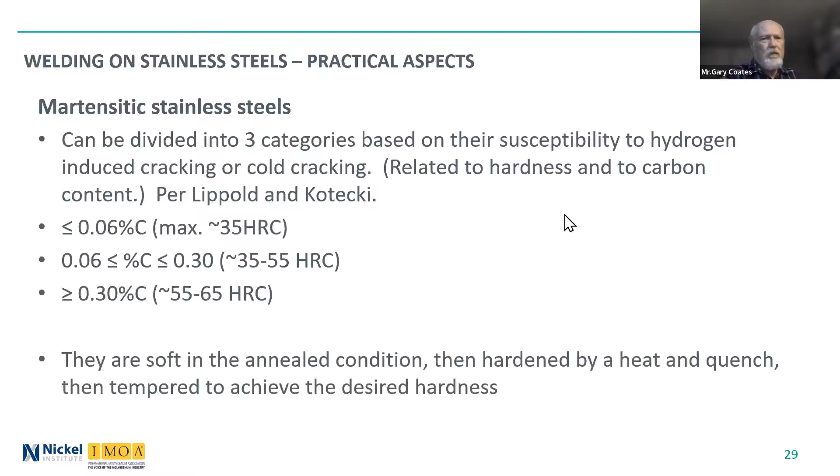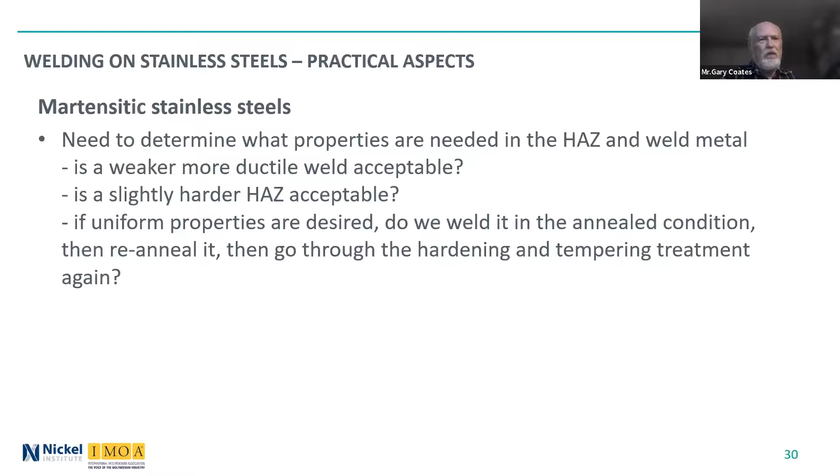One of the complications when welding martensitic stainless steels is you need to determine what properties you want in the heat affected zone and the weld metal. Can you live with a weld that is weaker but more ductile? Can you live with a slightly harder heat affected zone than the base material? If you really want uniform properties, one way is to weld it in the annealed condition, re-anneal it, then go through a hardening and tempering treatment again. All that adds cost and difficulty to welding them, so these are particularly tricky alloys to weld.

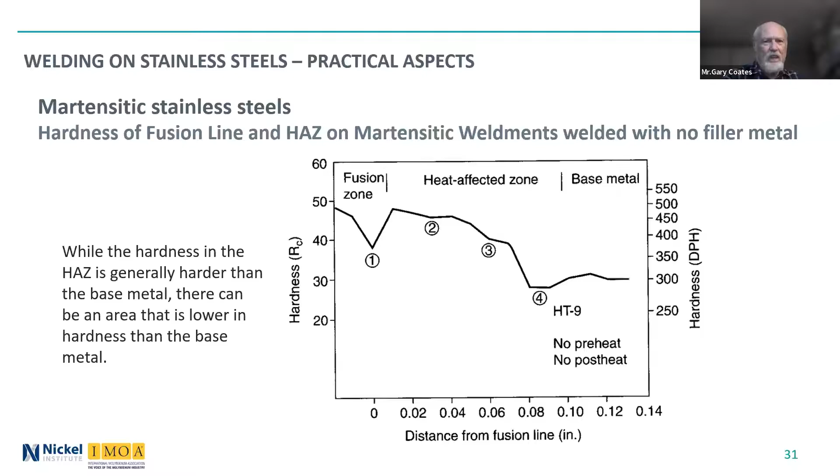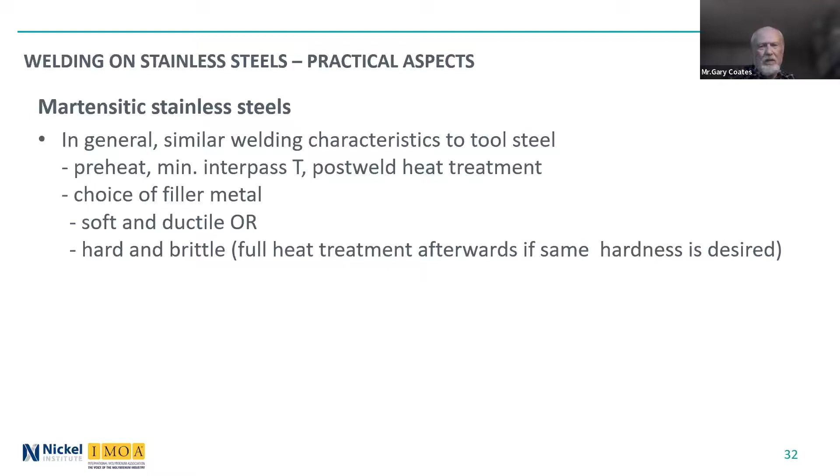I'm only showing this because welding martensitic stainless steels can be complicated. Very briefly, they have similar welding characteristics to tool steel as a general statement. You want to do a preheat, minimum interpass temperature, and you want to keep the interpass temperature high. Post-weld heat treatment is often needed. You have the choice of filler metal, soft and ductile, or hard and brittle, unless you do a heat treatment afterwards. The ones used in the oil and gas industry are generally the low carbon ones.

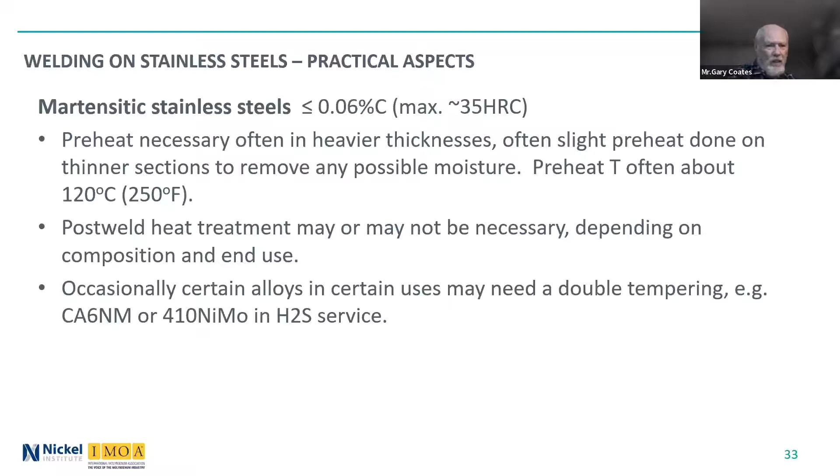You usually use preheat in heavier thicknesses, slight preheat maybe on thinner sections, mostly to make sure you remove any moisture from the surface because they are sensitive to hydrogen that may form when you weld a wet or moist material. The preheat temperature is often relatively low, 120 degrees C. Post-weld heat treatment may or may not be necessary. Obviously you want to try to avoid it, but it may be necessary. Most of the time, they can get away without doing post-weld heat treatment. In certain alloys and certain uses, especially in hydrogen sulfide services, you might need to do a double tempering operation - temper it at one temperature and then temper it again at a slightly different temperature.

With the intermediate carbon levels, as the carbon goes up, the hardness will also go up. Generally, you want to use preheat in thinner sections with an increased preheat temperature as you get thicker. You want the interpass temperature usually just above the MS value for the alloy - that's the temperature at which austenite begins to transform to martensite in a steel, and it varies with the alloying content. Generally, the intermediate carbon alloys do want a post-weld heat treatment, even if it is just a tempering operation, to get the best properties.

Finally, we come to the higher carbon martensitic stainless steels. Obviously, when you get to Rockwell C55 or to 65, they are very, very hard and very, very brittle. You do need to preheat for all thicknesses with an interpass temperature above that MS line, and they are tricky to weld. To avoid cracking, use very small welds with low heat input. But you also want them to cool to allow hydrogen diffusion because they are so sensitive to hydrogen that it's hard to avoid getting hydrogen into the weld. Generally, if you really want the best properties, you do a post-weld heat treatment.

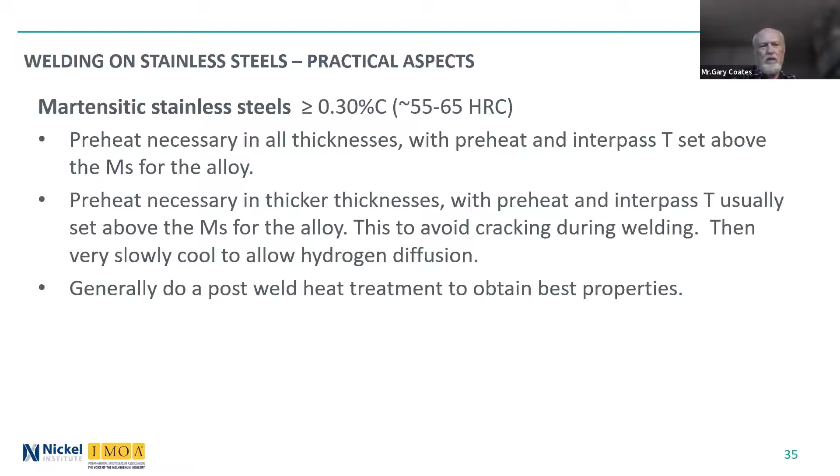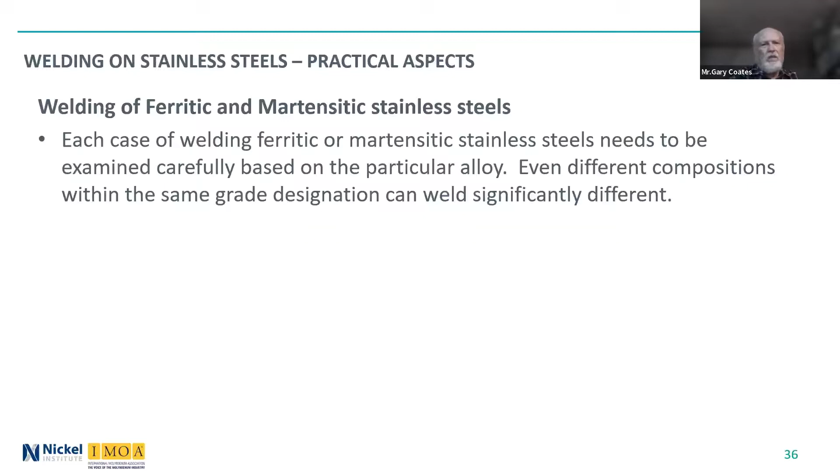So in summary, for the ferritic and martensitic alloys, each case needs to be examined carefully. It isn't that you can just use general rules and be safe. You need to really look at what particular alloy you want and what properties you want of the heat affected zone especially, and the weld metal. Even different compositions within the same grade can weld significantly differently. There's a number of different publications on our website, the Nickel Institute one, and the IMOA website also.

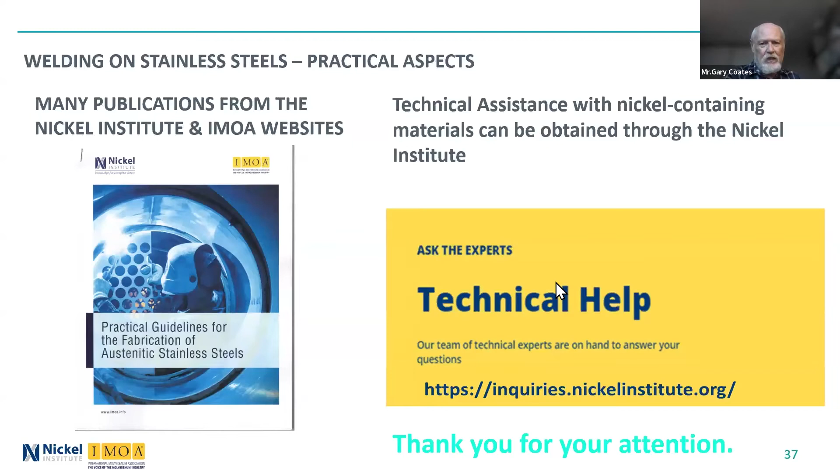Okay, so I will leave it at that. Thanks, Gary, so much - I know it's such a vast subject, very difficult to cover in an hour. So what we will do is send you all these questions - there are quite a number of interesting ones asked by the participants. We will send it to you over mail, and whenever you get time, you can reply, and then we will pass it back to them.